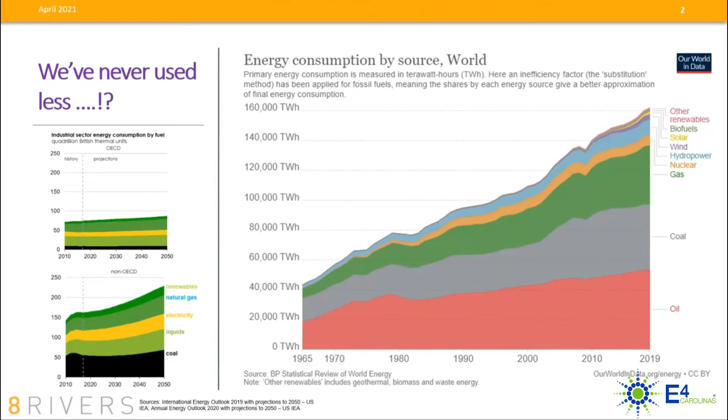Therefore, it is our thesis that you must physically touch the CO2, capture it, if you expect it to not enter the atmosphere. So that is the space that we plan to and have been focusing on.

In the IPCC report, in the 1.5 degree scenario, there's a particular graph that was presented that showed without emissions avoided through fossil fuels, CCS, as well as BECCS, bioenergy with CCS, it was going to be difficult to near impossible to reach a 1.5 degree scenario.

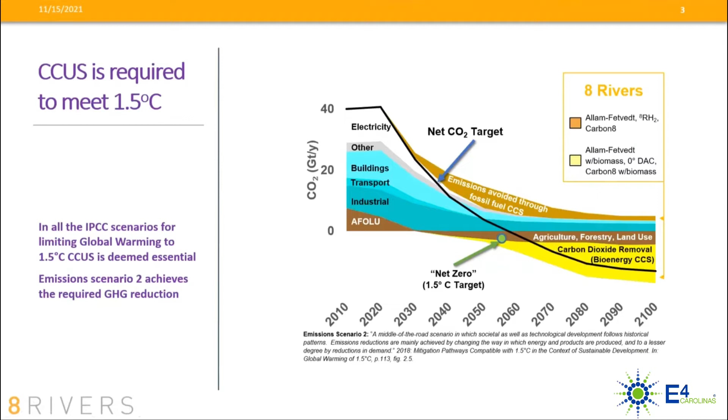Since 2018, with Xcel being one of the first companies to announce a net zero strategy, over 1,500 companies around the world have committed to some form of net zero at some point in time. These commitments and these companies that have committed to these targets are what 8 Rivers see as our core clientele.

As of 2019, 35 million tons of CO2 had been captured from anthropogenic sources and sequestered or utilized. The IEA projects that by 2030, basically 8 years from now, we'll be at 10 times that amount, and by 2040, we'll be in the billions of tons of CO2 globally. This is the opportunity that we at 8 Rivers see.

It's important to understand where these sources of CO2 are coming from so we know what markets to enter first. Oil and gas is an obvious one, and fertilizer is another. Fertilizer is important because we often think fossil fuels are only used in power plants, internal combustion engines, shipping, or aviation. But the natural gas that feeds fertilizer production has lifted so many out of poverty by enabling crops to grow in more strenuous conditions. Fertilizer production is in fact a significant source of CO2 emissions, and therefore a particular focus for 8 Rivers.

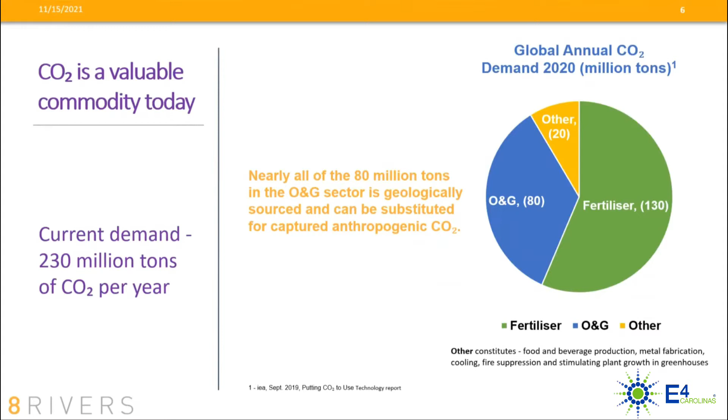From the NPC report, we developed a Sankey diagram to give a pictorial representation of all the sources of CO2, the methods of transport, and the ultimate utilization or storage points. What's interesting in 8 Rivers' approach is that we look to address everything from natural gas production to sequestration and CO2 utilization through the development of new products that utilize CO2.

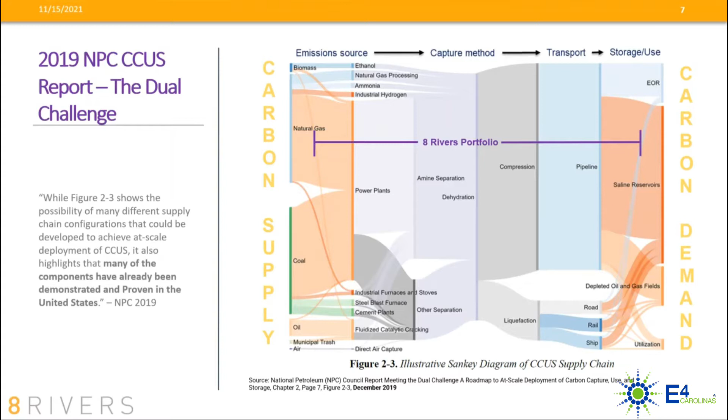When we look at utilization, we're looking at putting CO2 into aggregate material for cement, plastics, and helping to produce things like ethylene, the most produced organic compound on Earth. But ultimately, our objective is to put CO2 into products whereby it will never be re-emitted.

The largest potential source for CO2 storage is obviously pure sequestration, and so that is of primary focus. I'll touch on that more in a moment.

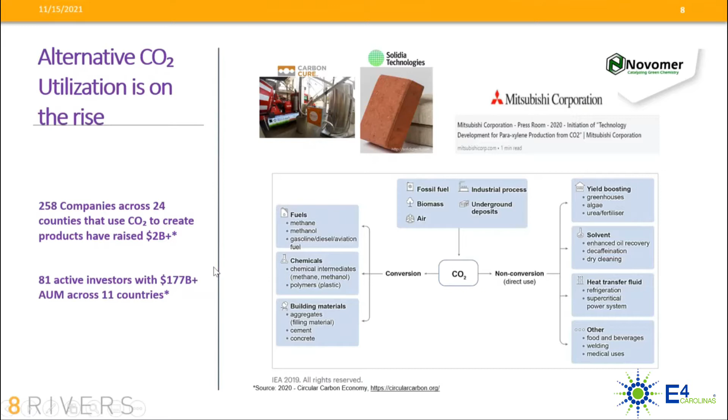It's interesting to understand that towards the end of 2020, there were 81 active investors in the CO2 utilization space, with over $177 billion under management across 11 countries. They've invested a decent amount of money, but not nearly the amount I think we'll see over the next 30 years.

The other opportunity we're seeing is that CO2 is a commodity. It will be priced by governments, by organizations and corporations, by markets and sovereign wealth funds. The World Bank and Morgan Stanley have agreed with our view and put out a CO2 pricing equivalency metric across various countries. This, along with companies that have committed to net zero ambitions, as well as ideal sequestration geology, is what 8 Rivers has employed to determine its key markets for initial deployments, a decade from now and two decades from now.

More on carbon pricing and forecasts from IHS and Bloomberg as well. Various countries have methods by which the abatement of CO2 emissions has been priced, either directly or indirectly.

With the recent infrastructure bill that's been passed, 45Q in the United States is looking to take a direct pay approach, whereby entities capturing their CO2 will get paid upfront from the government up to $85 per ton of CO2 sequestered. At that rate, some of our technologies become economic without even selling electricity or other byproducts. Strictly capturing the CO2 can produce a 5% IRR. So we think there's a significant opportunity coming.

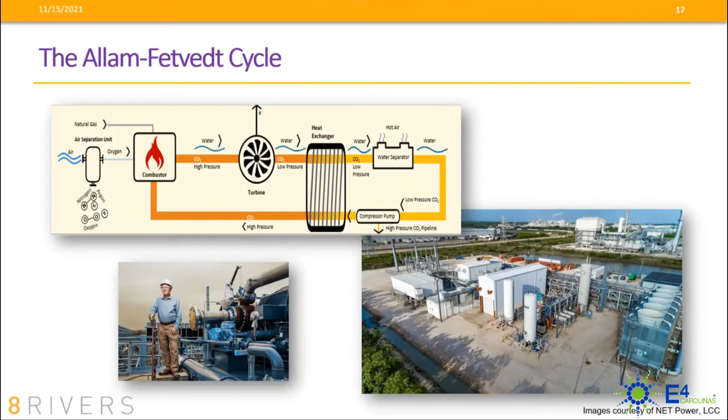The Net Power facility you can see there is down in LaPorte, Texas. We're right next to an Air Liquide SMR there in the background. So we're a substantial size. That SMR in the background is the largest in the Houston area. This facility is substantial in size and has been operating for most of 2021 after being offline for a bit.

As I touched on previously, 8 Rivers has licensed exclusively globally, not irrevocably - you know, all those terms I'm sure Monica can appreciate that I'm running through - to Net Power for the natural gas-fired Allam-Fetvedt cycle. The core Allam-Fetvedt cycle, when used with solid fuels, is retained at the 8 Rivers level, and we have full ownership of that particular technology.

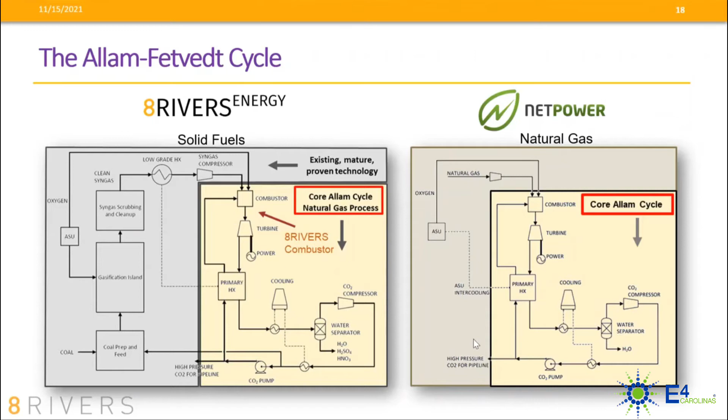And there are many companies around the world that are interested in this. When used with biomass, we create negative emissions power generation.

Now, given that I'm in Abu Dhabi, I thought it would be only fitting to share that in 2018, this little North Carolina firm was recognized in Abu Dhabi at the ADIPEC Awards. In 2018, we received the Breakthrough Technological Project of the Year award, and then were featured in the 2019 award series.

I was pleased to see that another organization that has a significant North Carolina footprint, Siemens Energy, has won tonight at the Emirates Palace the ADIPEC Award for Low Carbon Company of the Year. Very, very pleased to see that for them tonight.

All right. So that's a little bit about NET Power. From that, we've developed a zero emissions hydrogen production technology, whereby we take natural gas and pure oxygen, and we do a thing called partial oxidation with autothermal and gas heated reforming. So we're borrowing our heat recuperation expertise that I just spoke about with that heat exchanger. We're basically just backing off the oxygen a bit. So we're not doing complete combustion.

We're producing a syngas, and then we're fully oxidizing the carbon monoxide produced in that syngas through water gas shift, producing some additional hydrogen, and then inherently capturing the CO2 through both pressure swing adsorption for H2 purity, as well as a low temperature CO2 separation process after we use a dual phase PSA. We're using kind of a Johnson Matthey core ATR technology for this, and then building into it some of our expertise to achieve 99% carbon capture for hydrogen production.

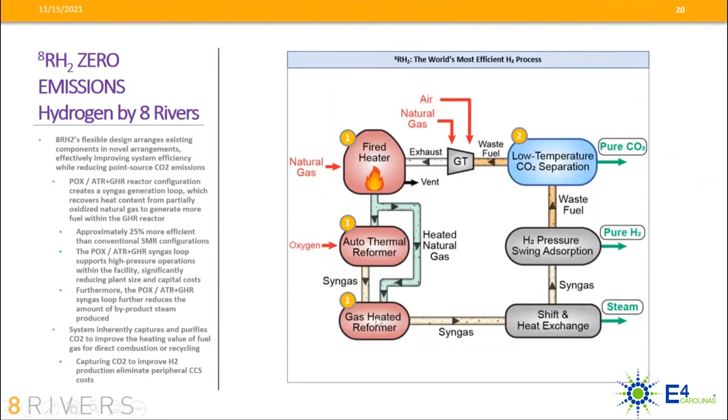Now, for this process, as well as the Allam-Fetvedt cycle, an air separation unit is required for the oxygen. The air separation unit also produces significant amounts of nitrogen. If you combine nitrogen through a Haber-Bosch process with hydrogen, you'll produce ammonia. And so if we go back to that first slide where I said we're very focused on the core industries where emissions are happening today, this kind of helps bring that full circle, whereby we're starting to look at solutions where we can integrate our hydrogen facility with Allam-Fetvedt cycle-based technology to get full carbon capture, and using just traditional ammonia synthesis processes to produce ammonia.

We can see efficiency benefits through generation and transfer of waste heat from the hydrogen facility to the Allam-Fetvedt cycle facility, as well as electricity being used from the Allam-Fetvedt cycle facility to run the auxiliary portions of the hydrogen plant and the ammonia synthesis plant, as well as the air separation unit.

I will say that the region that I'm in today, this construct is particularly attractive. I can't name the companies that we're engaged with, but there have been several announcements about ammonia being shipped to Japan as a zero carbon offset fuel, or a fuel switching method for abating emissions from existing coal burning assets in Japan. The reason that ammonia is good to replace certain types of coal is because its MMBTU value, its heating value, its energy value is similar

to that of coal. Now, ammonia can be more expensive as a fuel, and that's why key markets to look at are those that already have high costs of fuel imports. Places like Singapore and Japan are good first emerging markets to sell ammonia as a fuel source because their costs of energy, LNG, and other resources that are imported are already relatively high. Therefore, the economic swappability becomes achievable.

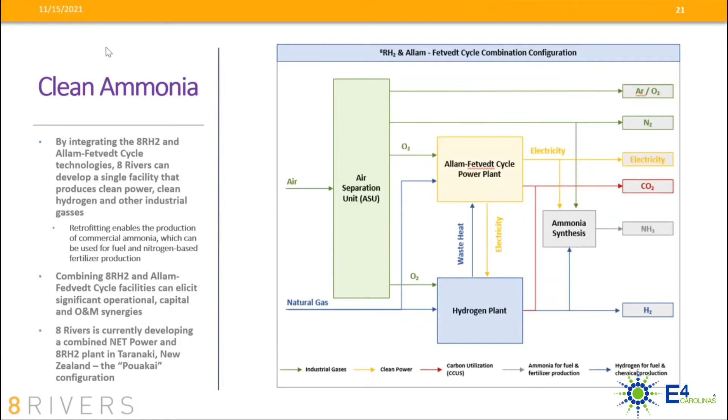Additionally, we've started to look at the flaring issues in this region in the Middle East. So typically, multiple BCF of gas, a billion cubic feet of gas, will be flared at the beginning of a well's life in this region, and tremendous amounts of CO2 and methane escape to the atmosphere. We've developed a relatively modular approach to cryogenically monetizing, capturing, and sequestering the waste products, as well as producing the valuable streams from that process.

Additionally, we've put financing mechanisms into the licensing of this technology such that the fuel produced and sold to a consumer would need to come with a CO2 capture certificate or abatement certificate, whereby that purchaser would then get a rebate were they to show that they captured a certain amount of carbon when purchasing this fuel. And we're working on developing a private party mechanism to incentivize carbon capture. A bit different than a 45Q, but there are certainly mechanisms that one can develop through a technology licensing strategy.

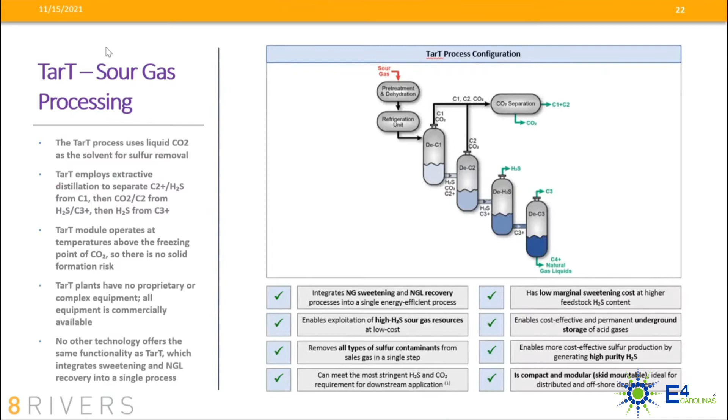So that's a bit on our technology portfolio. And now the couple things I didn't go through in that technology portfolio are, again, the carbonate solution, the direct air capture solution, and a process whereby we convert ethane to ethylene. Ethylene is the most produced organic compound on Earth, and we use CO2 instead of steam. Typically, you're steam cracking to produce ethylene.

And we've developed a mechanism to produce ethylene using CO2 as a soft oxidant, whereby you get ethylene and carbon monoxide and hydrogen as your products, and some water. And we believe that that will be a very promising solution in the years to come. We've been awarded a US patent and are working on international patents for that particular technology. Particularly proud of that, as I was the inventor for that. And we've got a long life for that technology, and so that's to come.

So now I want to get into a bit of our net zero project portfolio. So another thing we realized was developing and inventing technology wasn't enough. Unfortunately, there wasn't enough action by entities in the marketplace, and therefore we're taking a leadership position to take the first steps in developing projects and then bringing partners into those projects through selling equity in our project vehicles.